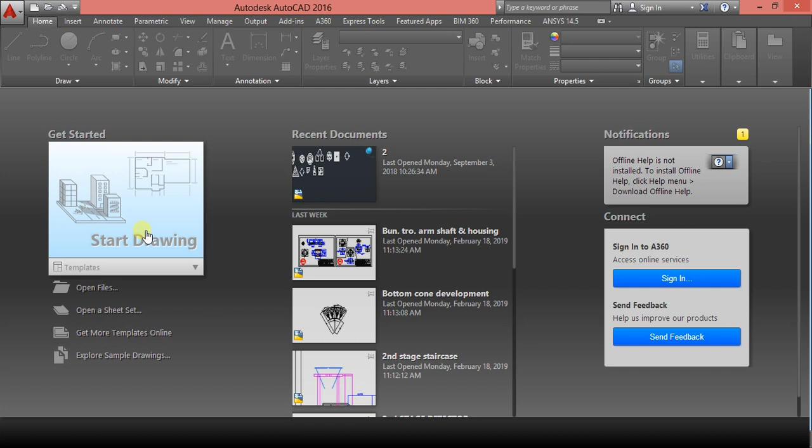This is the user interface of AutoCAD. First go to start drawing, and the drawing area is opened here. Type here unit, that is command UN, and press enter. Now there are types of unit: architectural, decimal, engineering, fractional and scientific.

Set here decimal, and according to the object we have to set precision. Keep here 0 precision. If the object has a point value, then you can save it here with points.

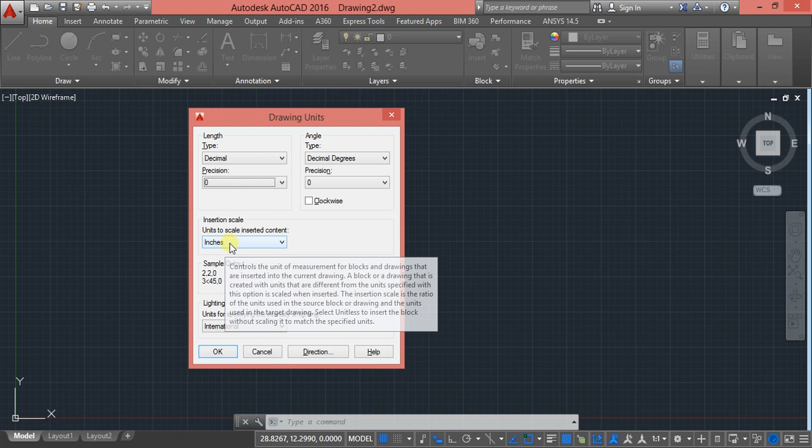For insertion scale, set the millimeter if object is small. If object is large, then set here meter. So keep in millimeter and press OK. See, my unit is set here.

Then I have to set limit. For limit, type here LIMITS, that is the command for limit. In display there is a lower left corner and upper right corner. The down and left side is called the lower left corner, and the coordinate origin is from lower left only, meaning x and y origin will be in the lower left corner. Upper right corner means the top and right side.

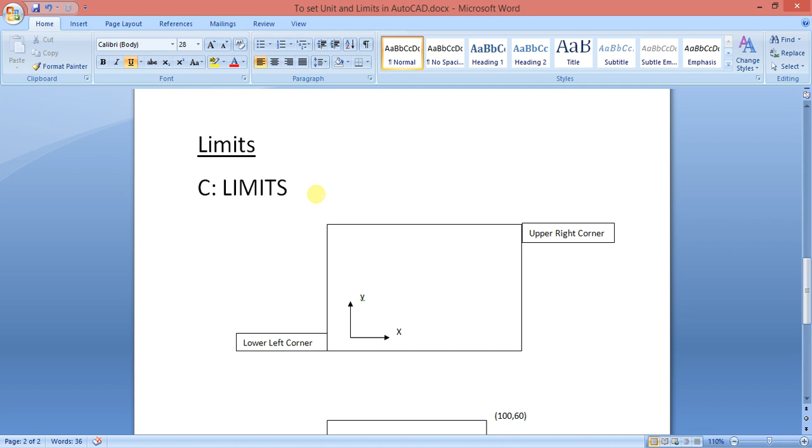So according to the object we have to set the limits. Suppose one rectangle is there, with length 100 and width 60. So here we have to set the limit to 100, 60, or we can say more than 100, 60.

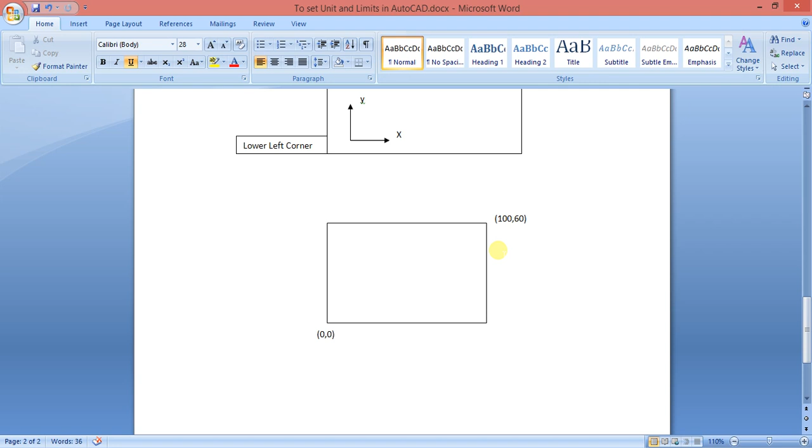Go to AutoCAD software. Here, without setting the limit, if I create the rectangle, you can see how it will be created. Type here REC, the command for rectangle, and press enter. Starting from 0,0, that is the origin, the lower left corner, then the upper right corner value is 100, 60, enter. See, my object is created, but it is large, it is out of display.

So if you zoom out, then you can see that object. So before drawing any object, first we set the limit here. If you want to go one step back, then type Ctrl Z.

Now type here LIMITS, and set lower left corner, that is 0,0 by default, then 0,0, enter, and then upper right corner, that is 100, 60, enter.

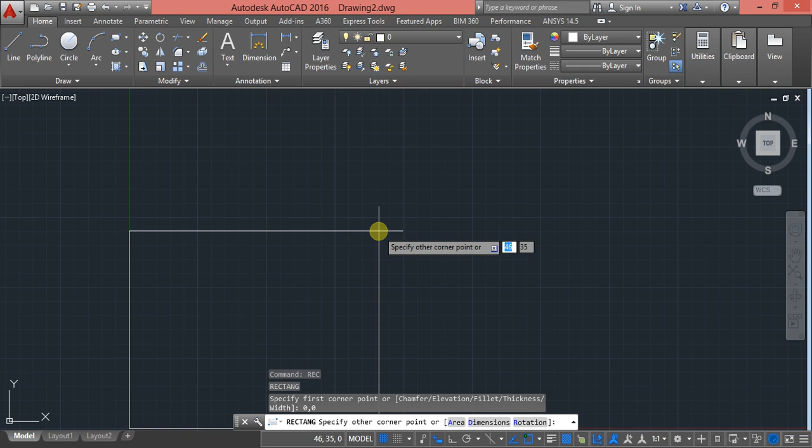So my limit is also set, but we have to zoom the display. For zoom purpose type Z enter, A enter, zoom all, then type REC for rectangle, starting from 0,0, enter, and ending at 100, 60, enter. See, my rectangle is created inside of the display.

That is the purpose of setting the limit. And I want to tell one more thing. If you know what area you have set the limit to, then you can see the area, meaning you can see the grid where the limit is applied.

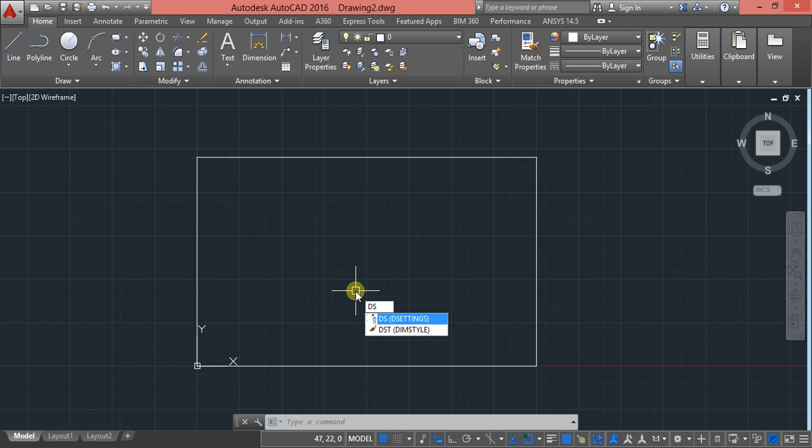So type here DS, that is the drafting setting. In drafting setting, go to snap and grid, and uncheck this mark, display grid beyond limits. If you uncheck and press OK, then you can see only the limited area here. This is the limit of whatever you set.

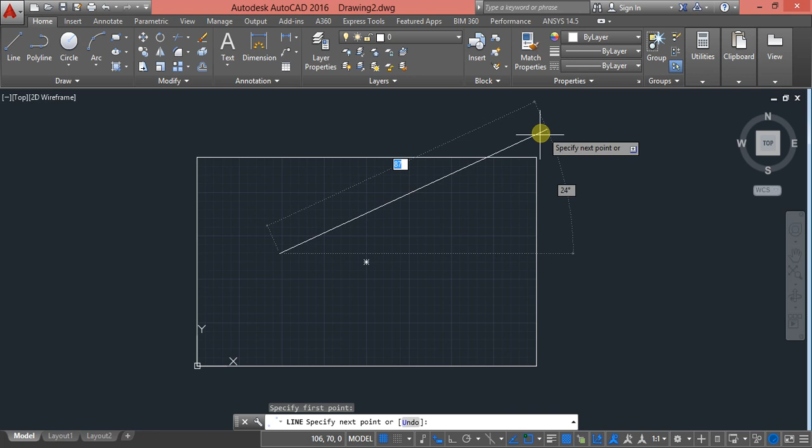Now we can draw here beyond the limit also, the diagrams. We can draw beyond the limits of the diagram. So Ctrl Z to undo.

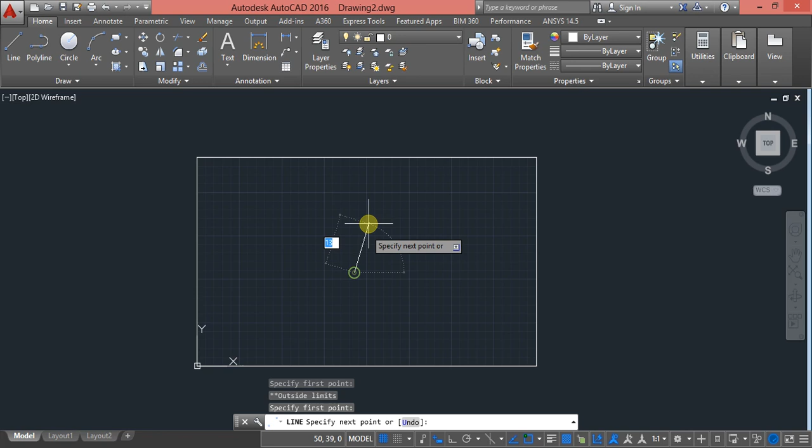If you don't want to draw beyond the limit, then type here LIMITS, and turn on the limit area. If you turn this on, then you can't draw outside of the limit, only inside. See, if you go outside and click it, you can't specify any points or any object.

Suppose I want to draw one circle, we can draw inside, but we can't specify outside of the limits.

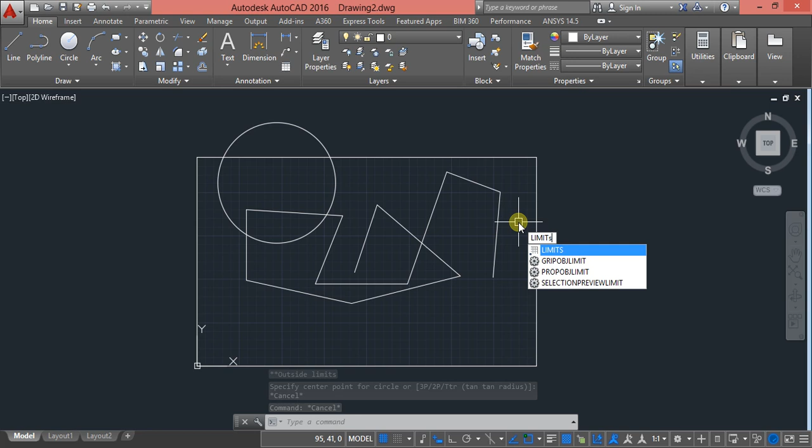So again type here LIMITS and turn that limit area off, and then go for drafting settings, that is DS, and check this box, display grid beyond limit, and press OK. Now you can draw anywhere.